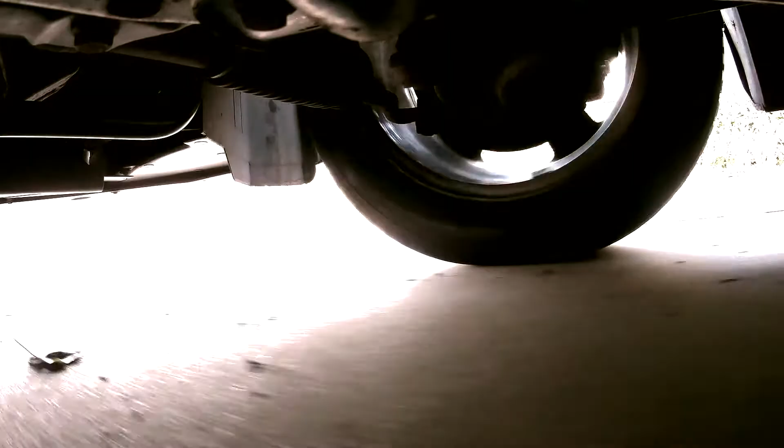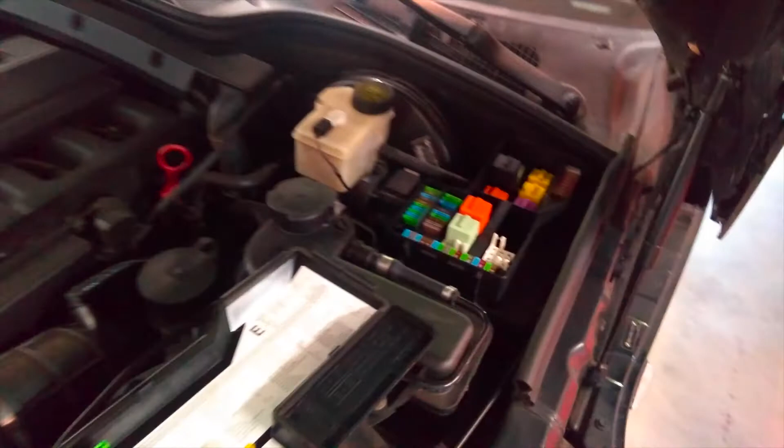First step of changing out the fuel filter is to actually starve the engine for fuel. The fuel pump is actually located in the fuel tank, and we basically want to drain that line from the fuel pump all the way to the fuel filter.

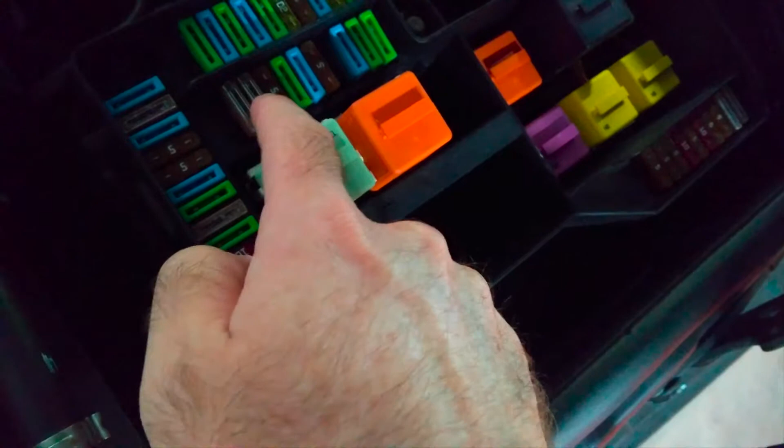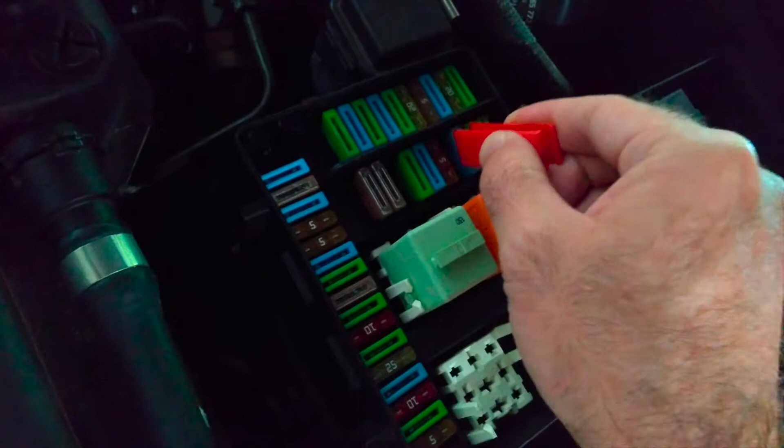The way to do that is to open up your fuse box here and read your little diagram for fuel pump, which is fuse 13 and 18. If you take those fuses out, the fuel pump will cease to work, and that will drain the line in quick order. So I need fuse 13 and 18. This is fuse 11, 12, 13, it's this 5 amp fuse here. Now I need fuse 18, so that's 11, 12, 13, 14, 15, 16, 17, and 18. For me, it's this blue one right here. These are the little tweezers that come on the underside of your fuse box. Simple as that.

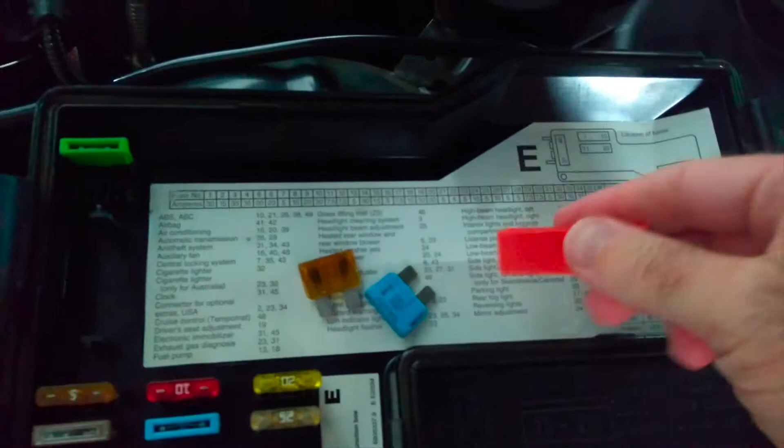Alright, so now I've got to turn the motor on and just wait till it dies, which should be pretty quickly. These go in. Turn the radio off, and let's try to start this puppy. Nothing doing. So I think we are drained in that fuel line.

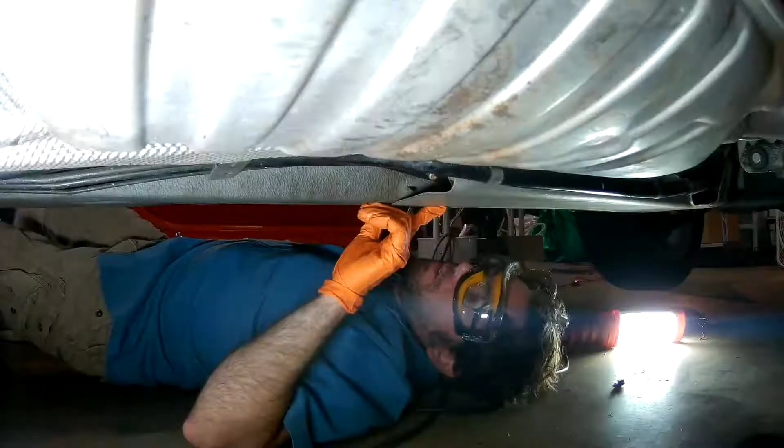All right, so we are under the car, obviously, and this is the panel that covers the fuel filter and protects it. We need to first take this off. This uses 10mm bolts, pretty standard.

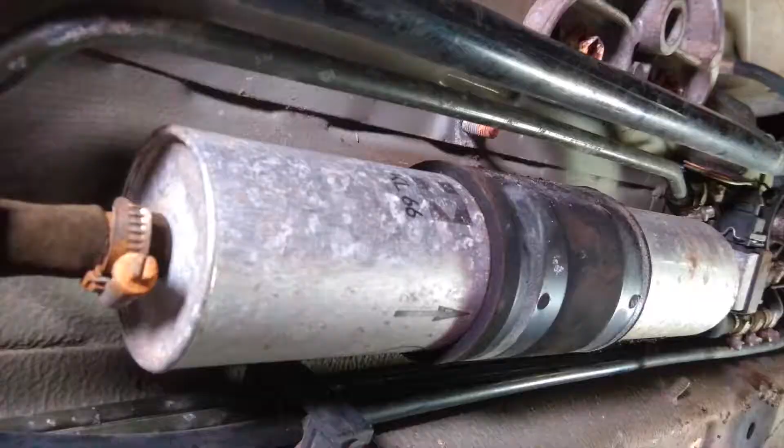Okay, so now that the cover to the fuel filter is off and the bracket is gone as well, time for a little close-up of what's actually going on here. So yeah, this canister is the fuel filter. You can see that there's an arrow, and this is pointed in the direction of the motor, right? So this line goes back to the fuel tank and the fuel pump. The rest goes to the motor, where it is consumed in combustion.

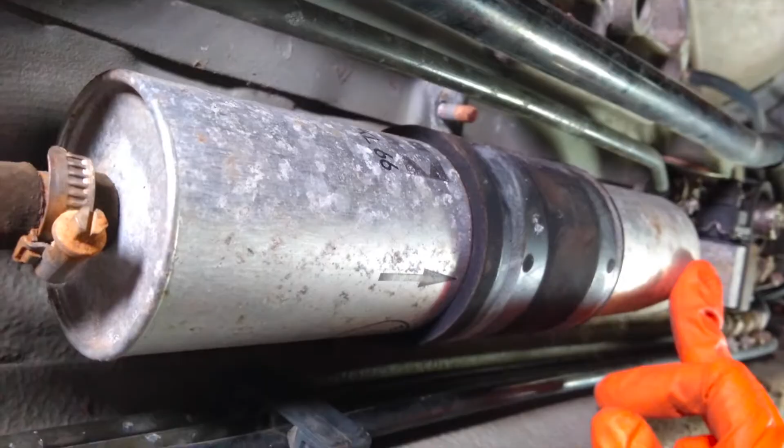It should be pretty simple from here because there's only two connections. There's one here at the point where it connects to the tank, and then at the other end there's just this one line that goes to the engine. So yeah, it looks like a piece of cake, but I do anticipate some fuel coming out of this, even though we drained the system by pulling the fuses to the fuel pump and cranking it until the fuel in the line ran dry, but that doesn't mean it's totally dry. So we're going to anticipate a small fuel spill and just expect that to happen. And if it doesn't, well, that's great too.

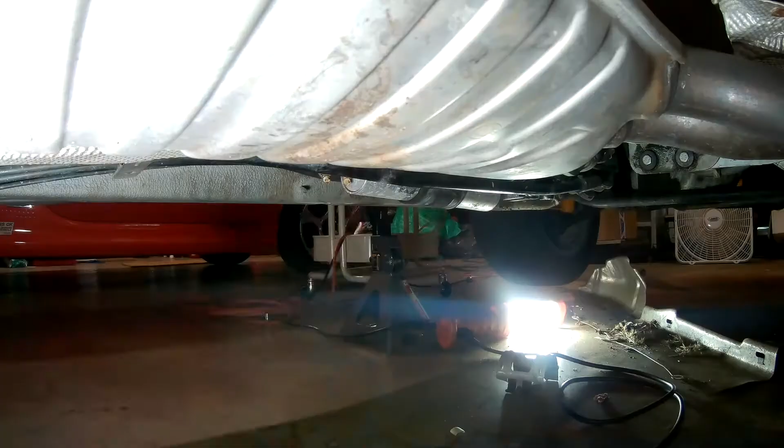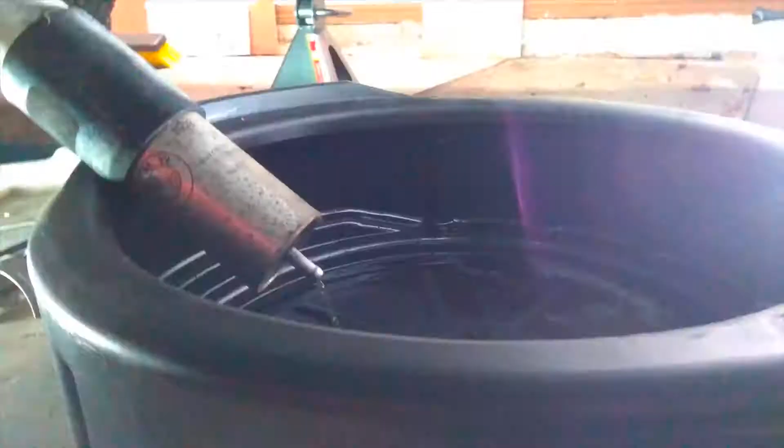Okay, so we've pulled the filter out, and as you see, it is draining basically from the engine side. So this isn't coming from the direction of the fuel tank, this is coming from the direction of the engine. I'm glad we had a pan here to capture all this, because this would be pretty messy otherwise. Again, this is fuel, so it is flammable. So, you know, use caution.

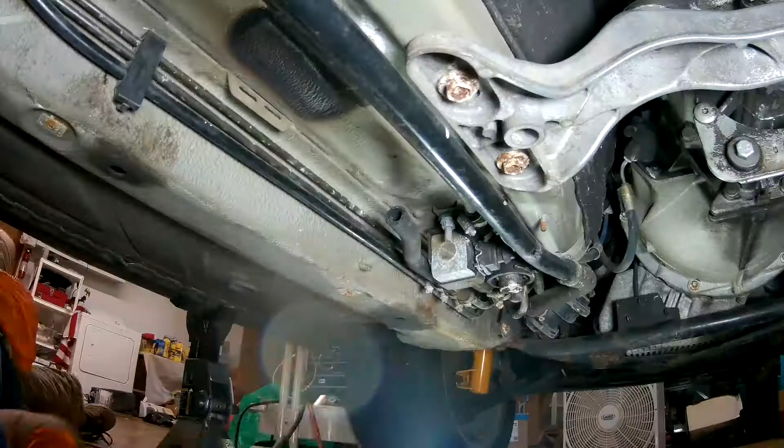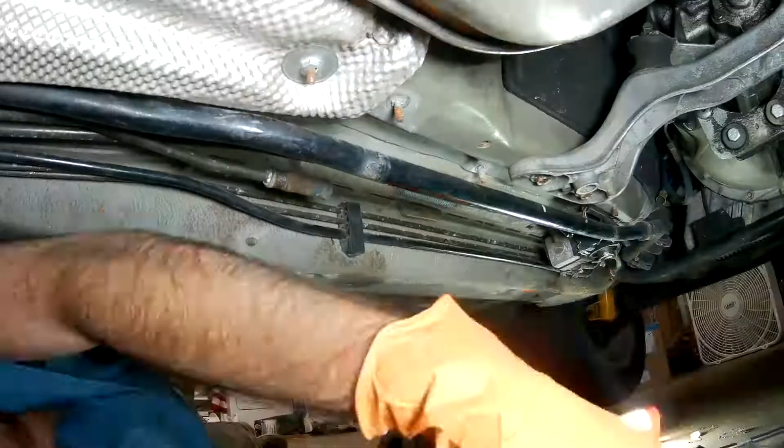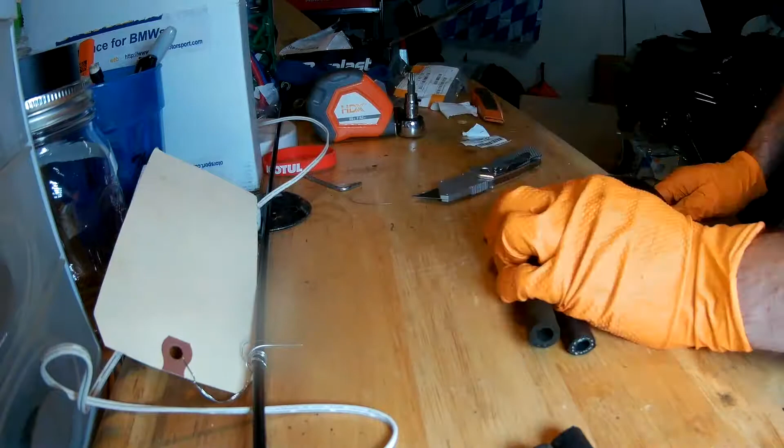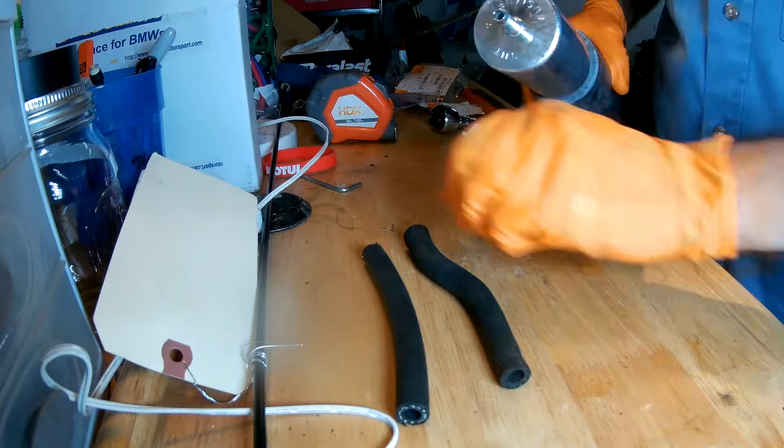While the fuel filters on these cars seem quite large, they still need to be replaced every 30,000 miles as part of a normal tune-up. This car was pushing 123,000 miles and seemed to be on its original filter, which meant it was overdue for a replacement. But it's not just a fuel filter you'll want to replace during a tune-up, but also the short rubber fuel hoses that feed into and out of the fuel filter as well.

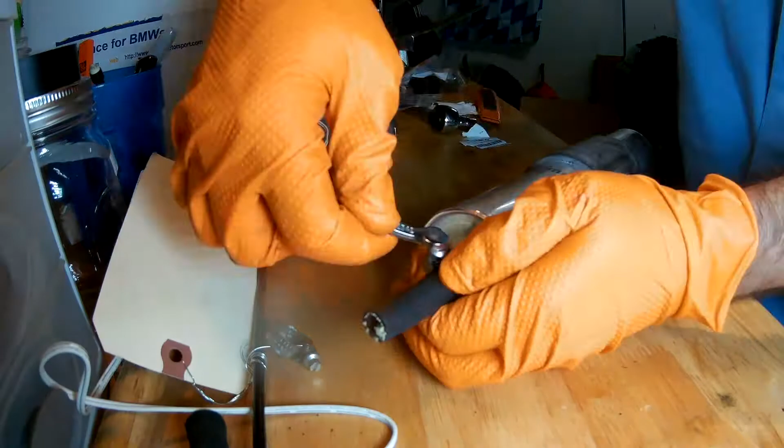For those fuel hoses, I used the BMW factory hoses and cut those to size, using the old fuel hoses as a reference. Now for the filter, I used a Mahle brand OEM fuel filter, and for convenience made sure to attach the new fuel hoses to the filter before I got back under the car and put it into position.

If you're not replacing your fuel filter every 30,000 miles, you can starve your engine for fuel and create a lean combustion condition, which can rob power from your engine, increase engine temperatures, and even damage pistons and catalytic converters. So replacing the fuel filter is really an important part of the tune-up process.

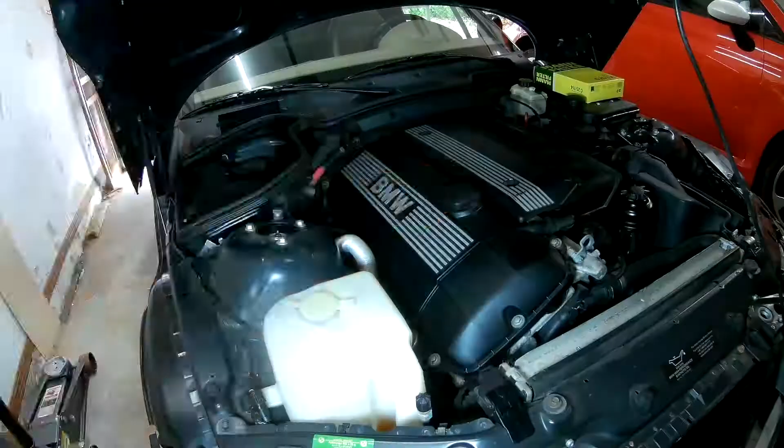Now with the fuel filter taken care of, it was time to move on to the spark plugs. These days, spark plugs can last quite some time, perhaps even 100,000 miles for some platinum plugs, and perhaps up to 125,000 miles for iridium plugs. For my replacement plugs, I couldn't really find a good deal on iridium plugs, so I just went with Bosch platinum plugs, which is what the car came with from factory.

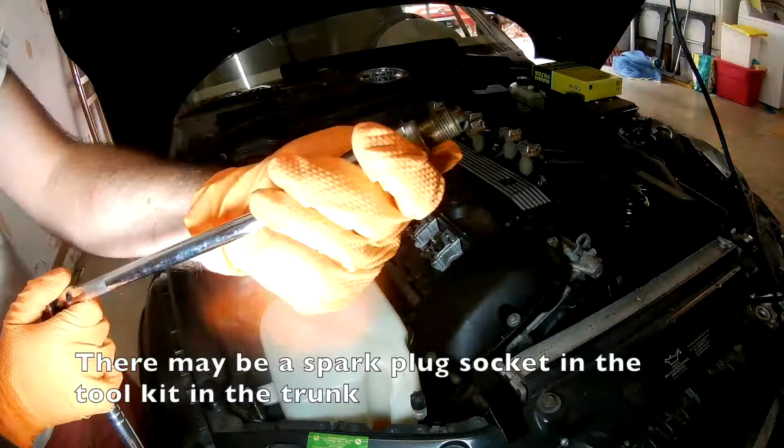Because these parts last so long, you don't really have to change them as part of a tune-up, but I say it's a good practice to change them out because reading the old plug can actually give an important indication of engine health.

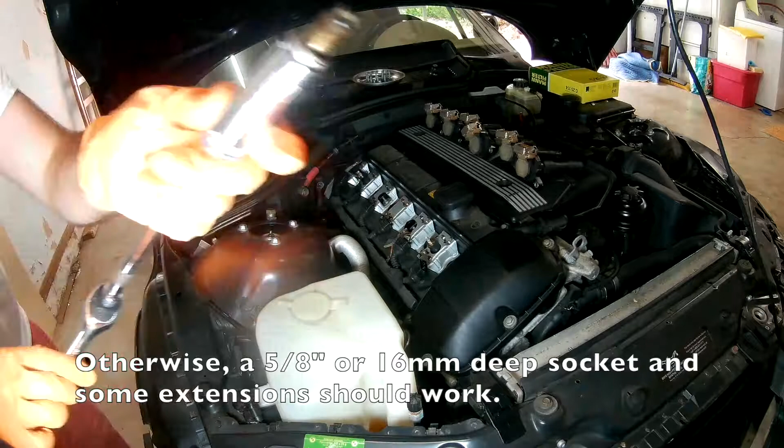Another benefit of replacing your spark plugs more frequently than 100,000 miles is that there is a risk of a plug seizing up in the cylinder head if it's allowed to stay in there for enough time and enough heat cycles. And in a worst case scenario, if you do get the plug out, it could damage the spark plug threads, which could require removing the head and taking it to a machinist if you're not equipped to repair the damage in your own garage.

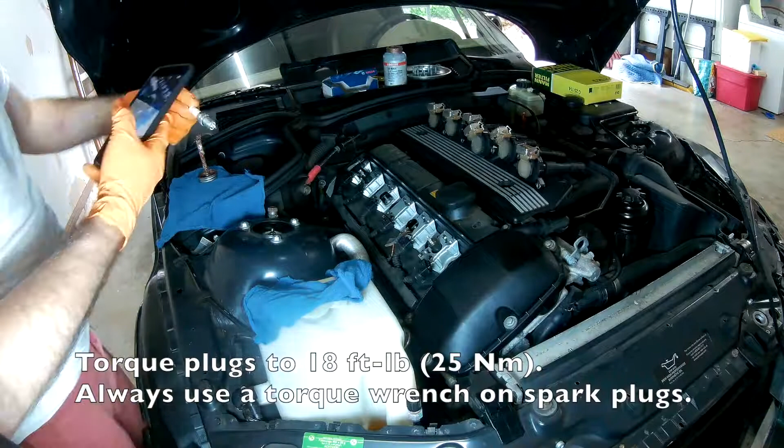So do change them out every 30,000 miles as part of a regular tune-up, and do use copper anti-seize on the spark plug threads. Just brush a light amount on the thread to provide a minimal barrier. You don't need to coat them. If you're new to wrenching, you may be surprised how often you use this stuff.

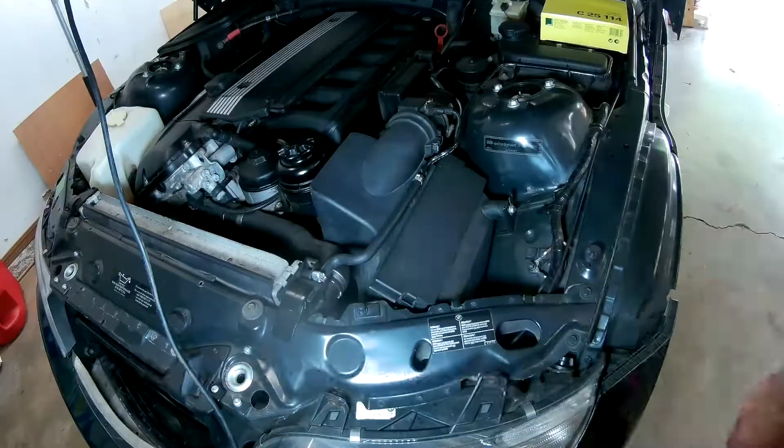The last step for the tune-up is replacing the air filter, which is very easy to access and replace, so there's really no excuse not to do this one. I didn't want to experiment with different kinds of filters, so I just stuck with the MANN air filter. It's the same brand I use for the oil filters on this car, and they're always of very good quality.

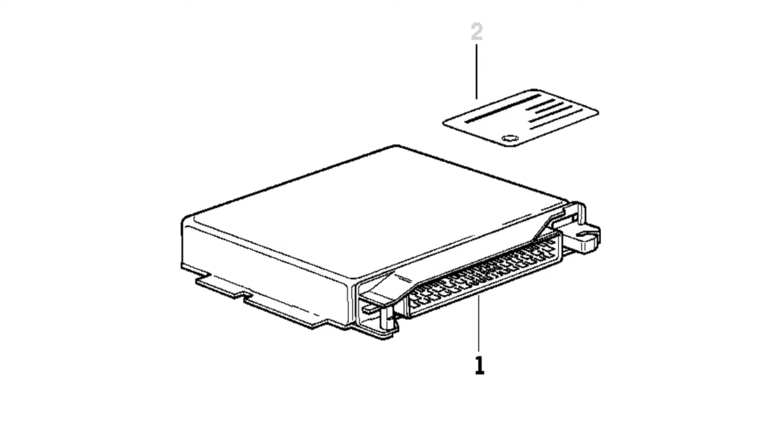I said that this wasn't going to be just a boring tune-up video, so to spice things up, I flashed the engine computer with a custom tune. This tune makes a number of changes, like richening the air-fuel mixture at lower engine loads, and raising the fuel cutoff to 7,000 RPM to eke out a little more power.

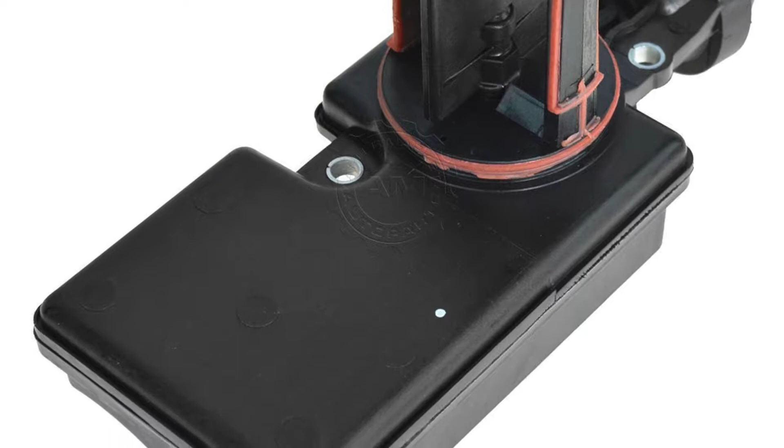But the thing I'm most excited about in this tune is the adjustment to the DISA valve. The DISA valve is part of the intake manifold on this M52TU engine, and is used to direct air to longer or shorter paths to the engine. The DISA valve is shut off at lower RPMs to make the air travel a longer distance, which helps create power at lower RPMs, and at higher RPMs the valve will open up to allow that same air to travel a shorter distance to the intake port, which generates more power at the high end.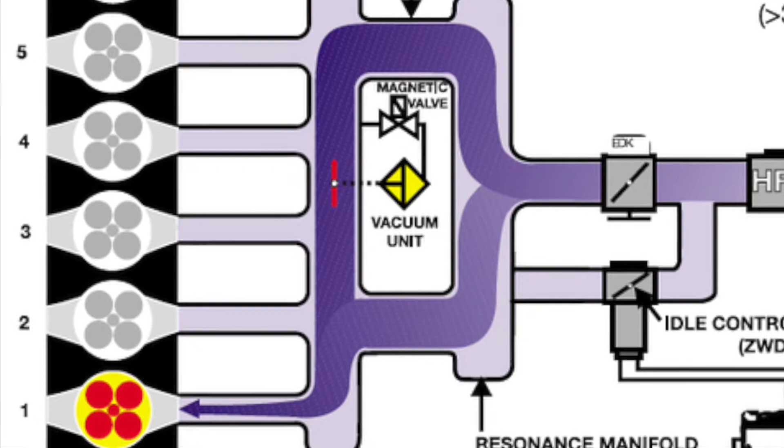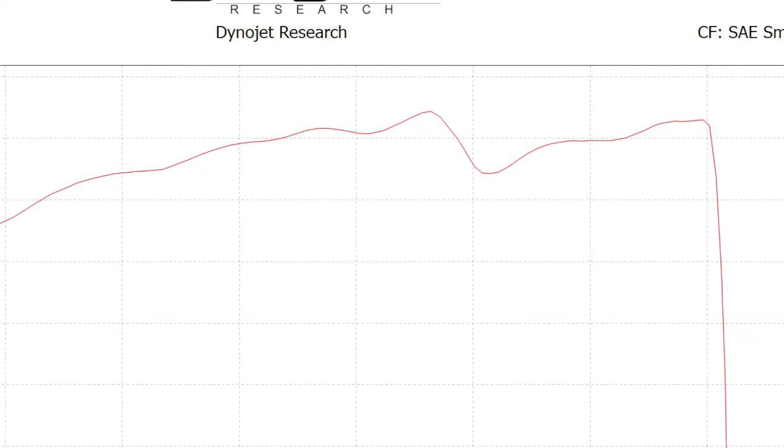From the factory, BMW programmed the engine to shut that DISA valve back up at 6,000 RPM. The downside to this is that there's more power to be found above 6,000 RPM if you just keep that valve open. And that's exactly what this tune does. It could be the tuning decision that makes the most dramatic effect on our dyno charts.

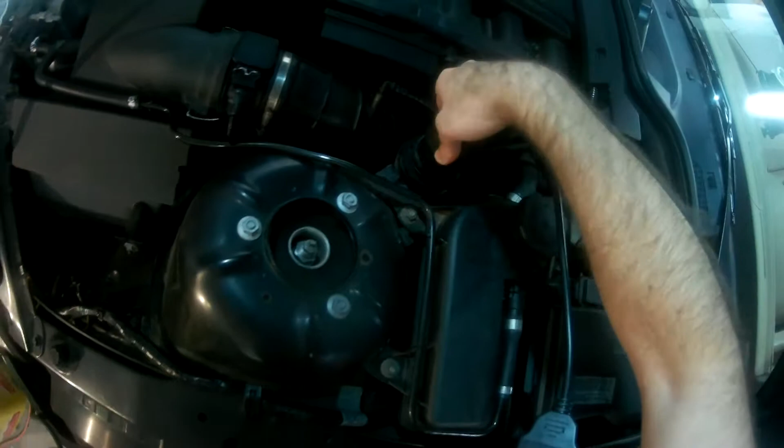I'm not going into detail about the process of flashing the engine computer because it would just be footage of me hooking the laptop up to the car and navigating through a couple of screens, but I will say that the application I'm using on the laptop to flash the engine computer is called Galletto, and the file I flashed onto the DME was created by a talented electronics expert I met on a popular BMW forum who had helped me troubleshoot airbag issues on this car in the past.

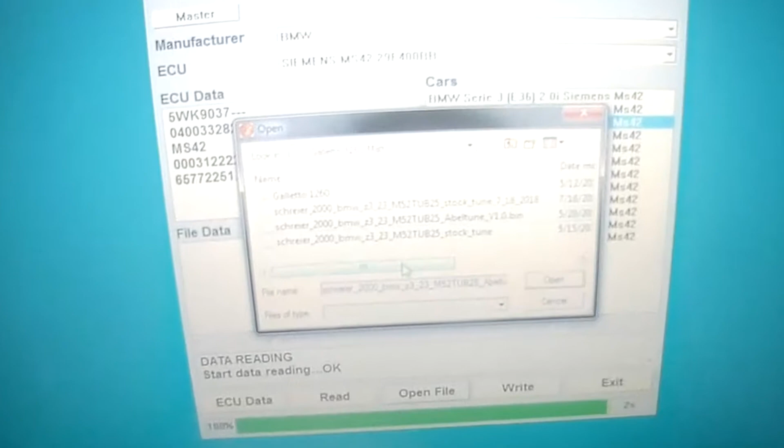With all that being said, there's only one thing left to do, and that's take this car to the dyno.

Okay, and now time for the moment of truth. I got my handy-dandy dyno chart from the Dynojet machine. Now, when I first ran this car on a dyno without all that tune-up stuff a couple episodes back, it put out at the wheels 147.05 horsepower. I mean, that seemed pretty good for a car inching up to 123,000 miles, but I am pleased to report some gains.

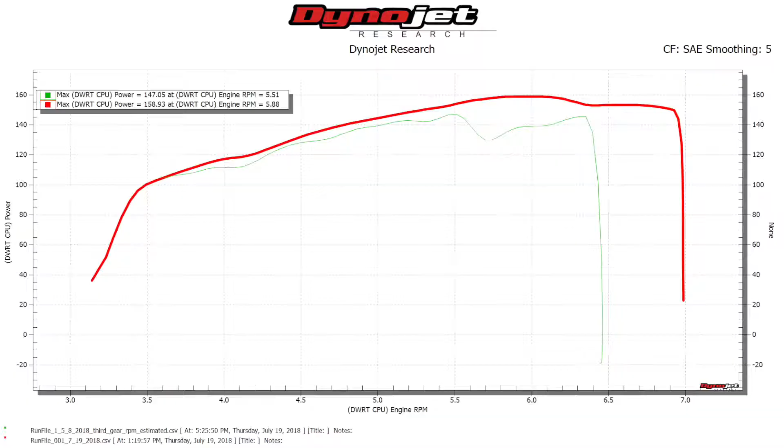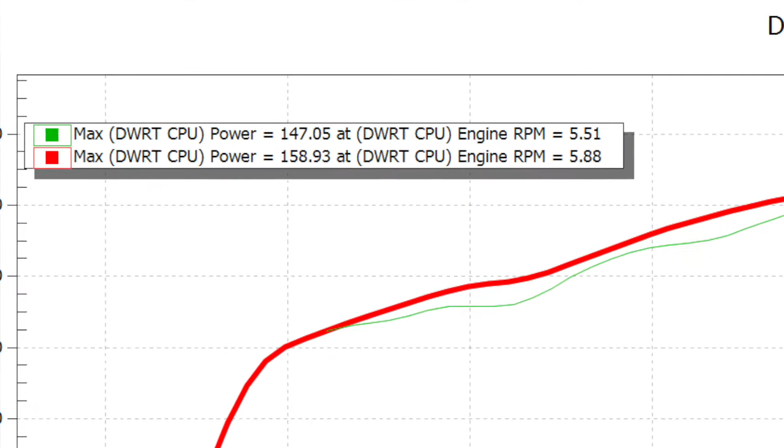With the new engine flash, and also the maintenance items that we did on this car, it now appears that on this car, at the wheels, we are producing 158.93 horsepower. So that is nearly 12 horsepower at the wheel from just a few maintenance things - spark plugs, fuel filter, air filter, and tune. And that's really about maybe 17 horsepower at the crank, so not a bad improvement.

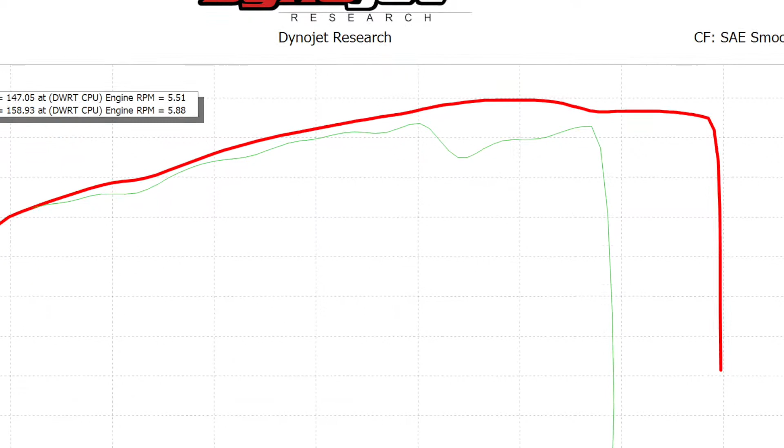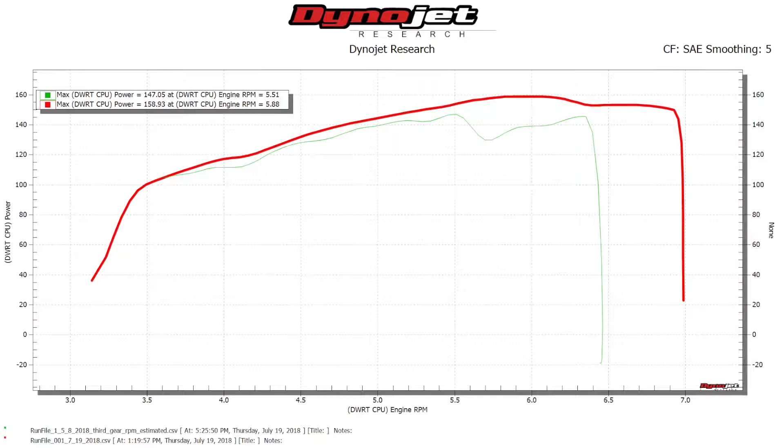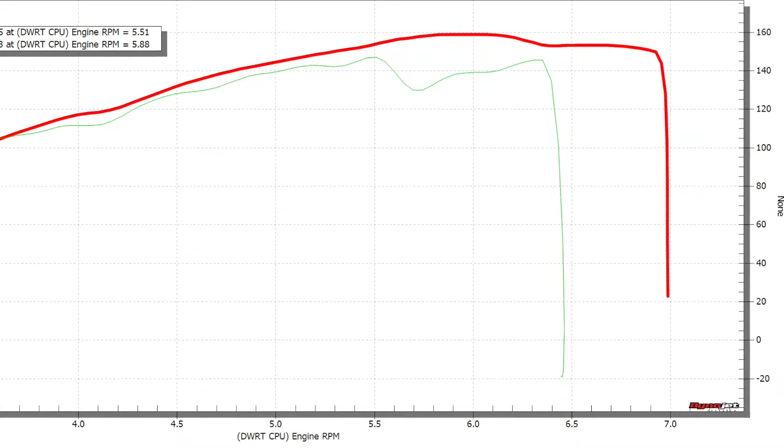Some other things on this chart that I'm pretty proud of, or at least pretty happy with, is that dip between 5,500 RPM and 6,000 RPM. Well, that's gone now, thanks to the changes to the DISA tune on this car. And also this dyno chart shows the line going all the way out to 7,000 RPM, where before it shut off around 6,500 RPM. So the tech was able to wring a little more performance out of the car by virtue of just keeping the revs longer.

So I'm very happy with this result for not a lot of work on the car. In the next episode, we are going to...